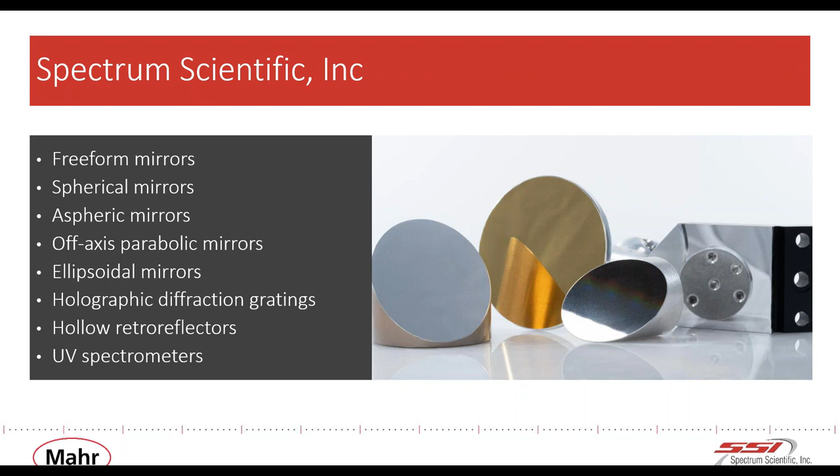We also have a range of miniature UV spectrometers and spectrometer components, which we supply into a variety of markets throughout the world.

Our freeform mirrors are manufactured using an optical transfer process that allows us to produce high-fidelity, high-specification freeform mirrors in OEM volumes at a fraction of the price of producing traditional freeform optics. Spectrum Scientific is currently delivering hundreds of freeforms each week using this process.

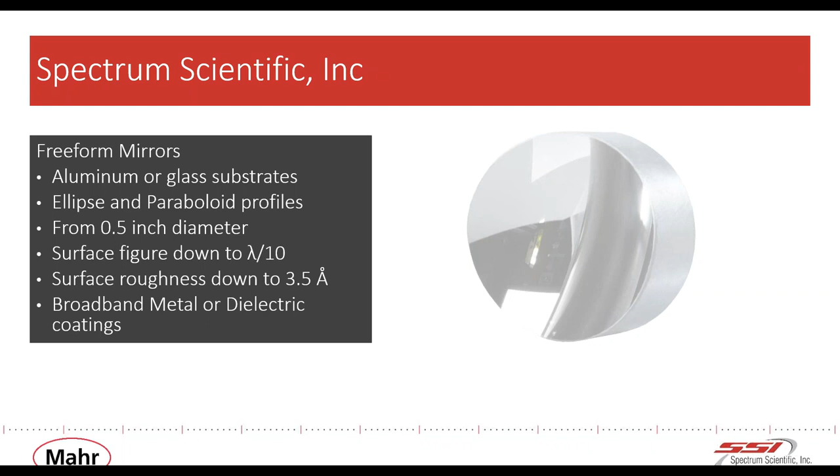We are providing lambda over 14 freeform optics right now. That's, by the way, peak to valley when I speak of these wavefronts. So we're providing lambda over 14 freeforms in production right now, and we've been doing lambda over 10 aspheres for many years. But again, it'll always depend on the size and complexity of the optic, whether that's achievable.

All right, enough about Spectrum Scientific. Let's get a few definitions underway. So according to the ISO standard, any surface that has no translational or rotational symmetry about the axes normal to the average plane is a freeform.

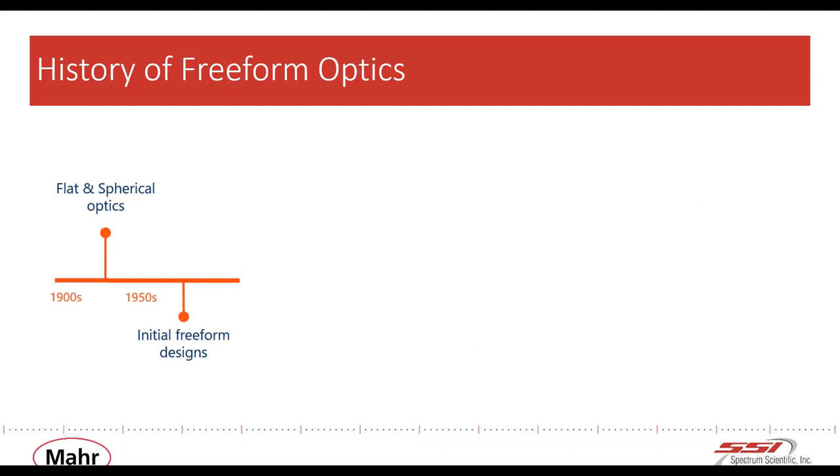So now that we've defined a freeform optic, let's give a brief rundown on the history. The concept of freeforms is nothing new. They've been discussed for a long time. Commercial manufacturing really didn't start until the 70s, and boy, back then they were called hand-figured optics.

Although a lot of the benefits of freeform optics were well understood, the cost and complexity of manufacturing meant that it wasn't until fairly recently that they've started to enter mainstream usage.

The enabling technologies were developed in the 80s and 90s when deterministic manufacturing processes came of age. Consistency of CNC machining, single-point diamond turning, deterministic micro-grinding, magneto-rheological finishing - these technologies all paved the way for this next wave of optical precision. However, even by the late 1990s, early 2000s, the cost of producing these was quite high and metrology methods were yet to catch up.

Now, in the past few years, metrology and manufacturing methods have evolved to better support the advancement of freeform technology. High-resolution cameras, improved encoders, software algorithms - those all lead to what we're able to do now. So companies, including Spectrum Scientific, now offer current state-of-the-art freeform optics in high volume with high fidelity and performance that in most cases is diffraction limited.

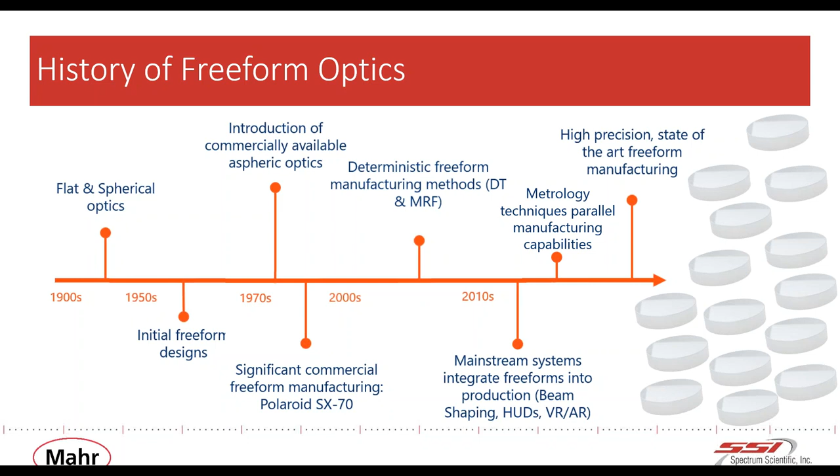As you know, nearly all technologies rely on precision optics. So naturally, freeform optics address many market needs as well, and they fit into nearly every technology sector for both high-tech and commercial applications. The advantages of freeform optics over conventional optics, such as increased aberration correction and optical volume reduction, can apply to a wide range of industries.

Some commercial applications include LED lighting, where they are able to more efficiently distribute the light energy. In the automotive industry, nearly all headlight lamps and reflectors are a type of freeform shape, and they've been doing freeforms for many years. Industrial applications include high power lasers for beam shaping using freeform lenses. In life sciences, they want compact devices for point of care. In telecommunications, designers are continually pushed and required to come up with more compact, optically efficient designs. One of the interesting applications for defense and aerospace I came across recently was aircraft wing optics - those are pretty interesting. If you ever get a chance to look into those, it's really quite fascinating what they're able to produce.

In the past, freeform optics were often too costly and too time-consuming to manufacture. So recent advancements in optical designing, manufacturing, and metrology are creating more opportunities to utilize freeforms in a wide range of industries and applications. So we've kind of grouped them into three here on this slide. We have non-imaging applications like LED lighting, laser beam shaping, illumination, light collection. We focus mostly on imaging optics here at Spectrum Scientific.

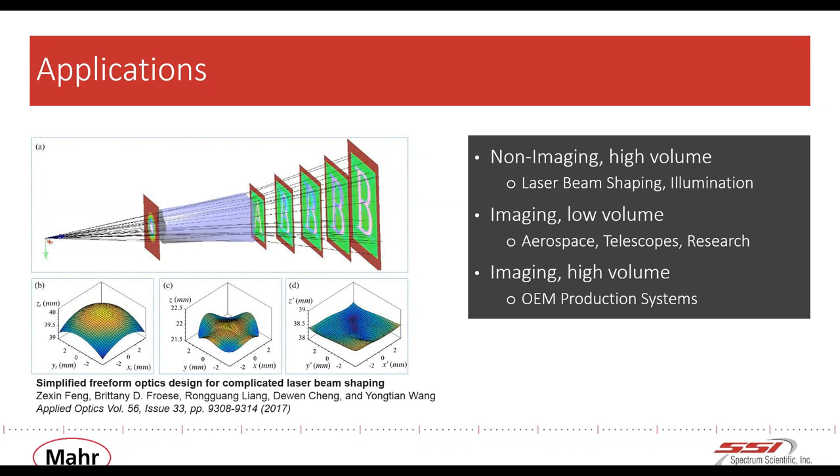So why are some companies choosing to go with freeform optics? I'm sure you already have many of your own ideas. I'll go through a few of the ones I know of.

Clearly, fewer optics in the system is a great advantage. When you can combine the function of two or more optical surfaces into one, that becomes quite powerful. Fewer lenses and mirrors means less optical scatter. In some cases, fewer elements means reduced assembly time. And of course, fewer components lead to lower hardware costs and less inventory.

Overall performance improvement is clearly one of the most common advantages and sought after reasons to go to freeforms. We've seen companies who've just improved one optic in an existing system, and suddenly they're getting diffraction limited performance or other performance improvements just by changing a single optic.

Space applications benefit greatly when using freeforms because reduced mass and volume are key benefits for launch requirements. Bulky lens assemblies have been converted into off-axis mirror designs. The Center for Freeform Optics has a great example of this. If you go to their website, they were able to convert a large lens assembly into a few reflective mirrors and really decrease the size while maintaining performance.

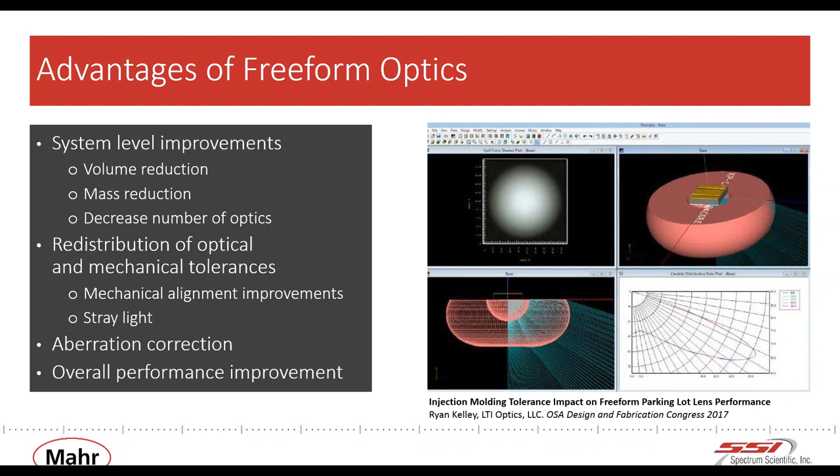Like many optical systems, application environment and other system requirements will often determine the best manufacturing and measurement method. Each and every freeform project will be unique, so each manufacturing case needs to be treated separately.

Some designers often ask, what are the limitations? When have we exceeded what can be manufactured? Basically, I think it's steep curves that are the most challenging, not just to make but also to measure. We'll address that a little bit more in an upcoming metrology slide.

So what does the designer need to provide to the manufacturer to be successful? As we stated earlier, the customer supplies a surface equation to the manufacturer, and we strongly suggest that both parties generate and compare SAG tables. This table is verified by the customer, and it becomes a reference table for a point cloud that will be generated.

By contact or non-contact probes, or even interferometric data. In most cases, aligning a freeform is similar to aligning an off-axis asphere, where all 6 degrees of freedom must be precisely controlled. Therefore, the surfaces should have reference datums or alignment features that can be picked up by the machine operator and the end user. This is extremely important during manufacturing, and we're going to touch on this later because the fiducials and alignments are that important. So we'll come back to that.

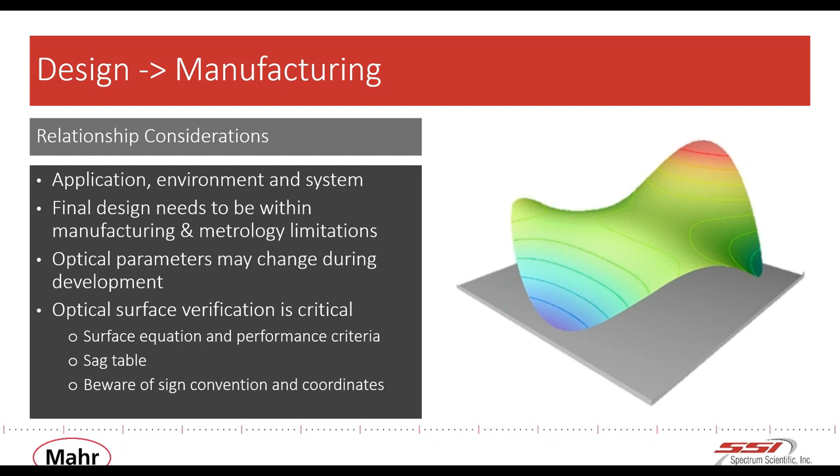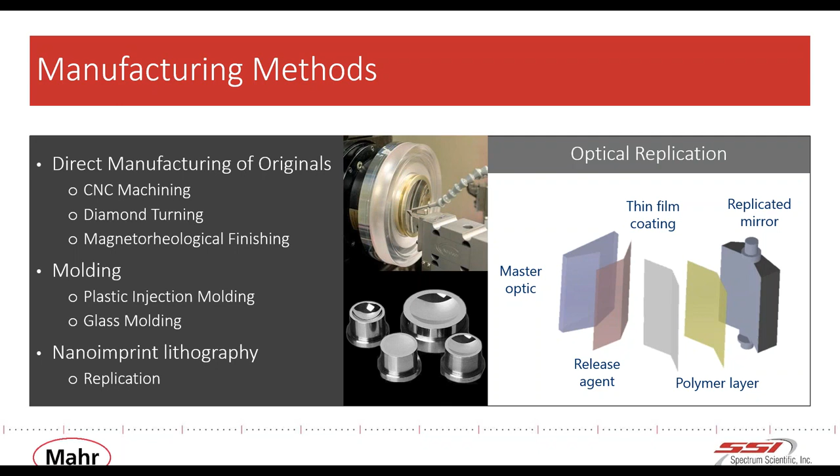Manufacturing freeforms directly, they're done one at a time, unless it's a lenslet array or a set of micro lenses. For larger optics, you don't just gang them up on a spindle and grind and polish them all at one time. They're usually made one at a time. So as you can imagine, that requires many hours of grinding and polishing to produce a single part, and a machine can be tied up for a long time.

Injection molding and replication type processes have the advantage of making a set of molds or tools that can be used to create dozens or hundreds of parts at a time. Also, for direct manufacturing methods, part-to-part and batch-to-batch variations are common, especially for high specification parts. Methods optimized for high volume production have reduced variability since each part is obtained from the same master mold.

There are cost considerations for higher volume production scaling. When you're manufacturing originals, there's usually a setup fee, an NRE tooling fee, typically a few thousand dollars. For higher volume manufacturing methods, there's a higher upfront cost, and that kind of makes sense when you think about it, because we're moving more parts through the production floor, so you have more carriers and fixtures to associate with all these parts being made.

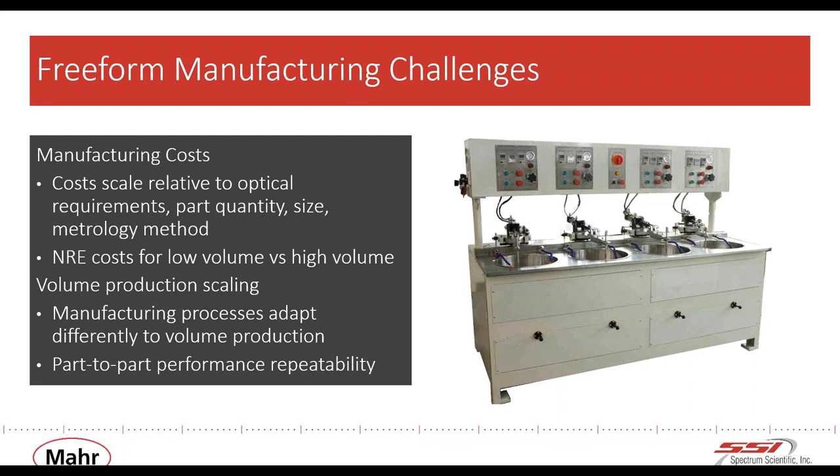So we move to the metrology side. Testing and measurements are taken by contact and non-contact methods. Besides mechanical dimensions, optical parameters usually include surface figure, roughness, and mid-spatial frequency. Of course, different applications require different levels of precision for each measurement parameter.

For replication and molding processes, the master molds are measured to a very high level of detail. However, not all these measurements are always necessary during final production. Surface roughness and mid-spatial frequencies will typically remain constant during production. It's surface figure and cosmetic inspection that are commonly the parameters that are measured. So for some customers, we measure those 100%. Some customers allow us to do batch-to-batch testing or AQL testing for a given batch size.

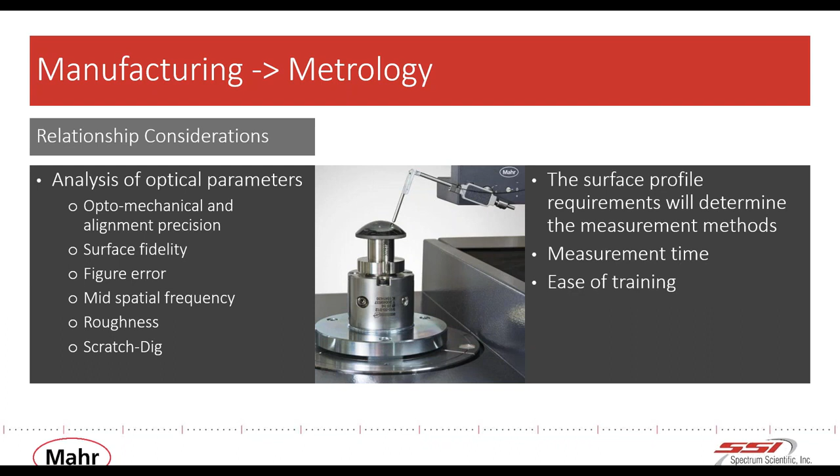You might recall I mentioned that for freeform surfaces, only a few microns or fringes of departure is required from a standard surface, so nanometer level metrology must be used. When using interferometry, if the slopes are too steep, the fringe density on the interferometer will exceed the pixel resolution. So it helps to have a high-resolution sensor. If you cannot resolve the fringes, you're going to have to move to a probing method, either contact or non-contact probing.

Not long ago, CMM was a common method of measuring freeform surfaces. I recall even 10 or 12 years ago, I was in a shop, and that's how they were doing it. They were using the CMM to get a point cloud. However, the newest generation of contact and non-contact probes offer tremendous precision.

I need to get back to fiducials again. Freeforms are more susceptible to alignment errors than conventional optics. Most aspheric surfaces can be measured with interferometry using first principle methods, where point sources and plane wave interferometry can be used to null the wavefront. Freeforms do not have this advantage.

Therefore, fiducials and datums are critical for angular and linear coordinates. The manufacturer will use these for production and test, while the end user will rely on fiducials for system integration.

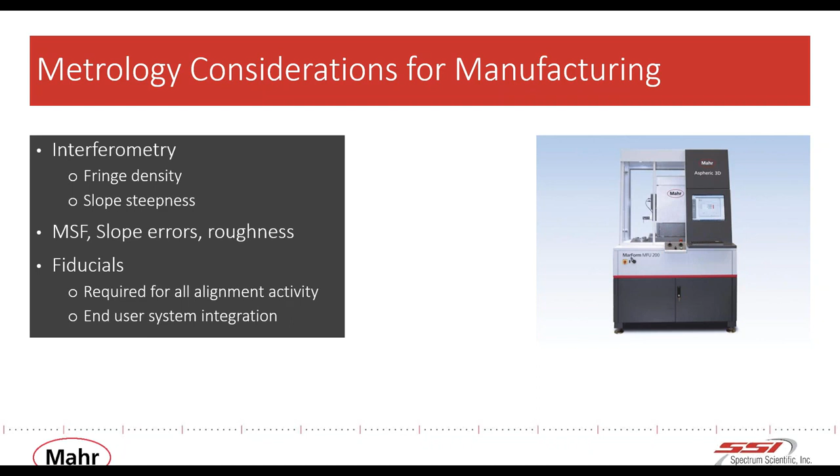Thank you. Yes, hello everybody from my side as well. Thanks to Byron and David so far.

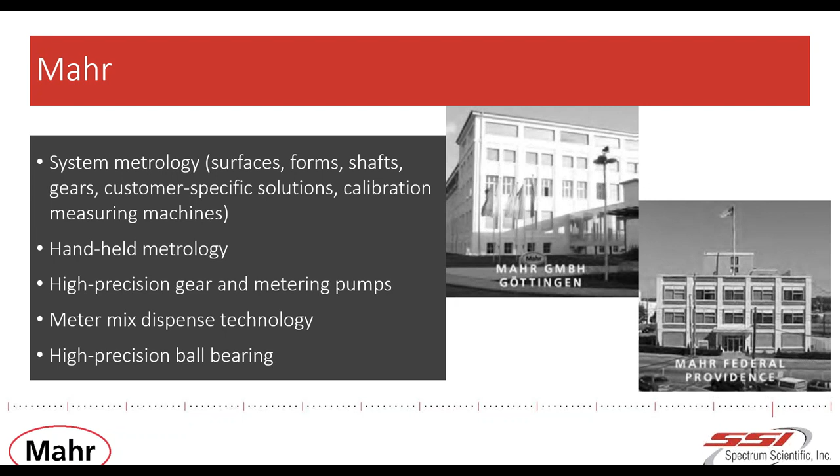Let me start with some words about Mahr first. Mahr is a family-owned company looking back on more than 150 years of history. We have approximately 2,000 colleagues working in subsidiaries in 18 countries worldwide, and Mahr is active in more than 60 countries. The main business is dimensional metrology. The company became well known for its handheld metrology like calipers or indicators, but is nowadays also developing and selling complex measurement machines for automotive industry and of course for the optical industry.

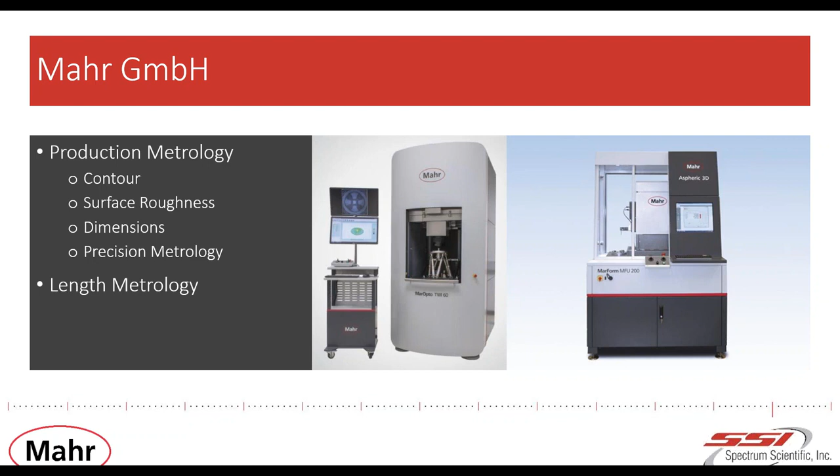The wide spectrum of products covers the measurement of a number of quality characteristics. Especially in optical manufacturing, measurement solutions are available for every process step in the production of optics. This ranges from 2D tactile profilometers for the correction of grinding processes up to non-contact point sensor systems and interferometers used for quality control during polishing.

Okay, let's talk about freeforms. David already mentioned that fiducials play a special role when it comes to mounting, manufacturing, or measuring of freeform optics. We can simply translate the word fiducial as reference. Here's a simple example that should give us a feeling of what a fiducial is.

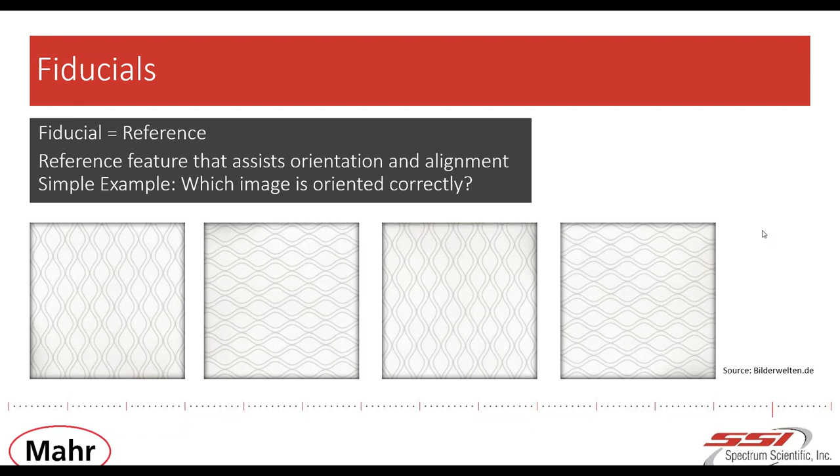We have 4 pictures showing the very same wallpaper, and if I ask somebody which of the pictures has the correct orientation, you would probably say you have no clue. But if we enlarge the picture section, so this little lamp becomes visible, we are able to answer the question because we know about the usual orientation of a lamp. We use this lamp as a fiducial in order to eliminate the freedom of rotation. This is basically the main function of fiducials. They are required to reduce the degree of freedom.

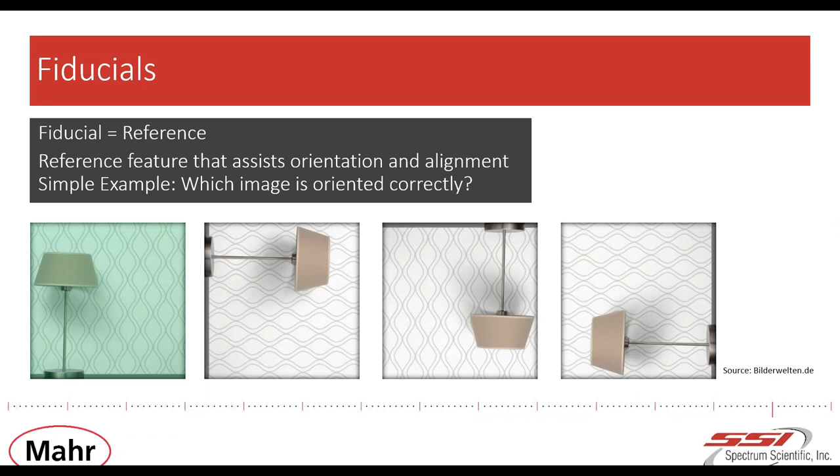Reducing the degree of freedom becomes important when we measure optical surfaces, especially freeforms. In order to make the errors of the surface visible, we subtract the nominal shape from the measured data. To do this, the data are fitted into the nominal shape in order to minimize the RMS value of the differential surface, which is the result. In the 3D measurement, we have 3 translational and 3 rotational freedoms.

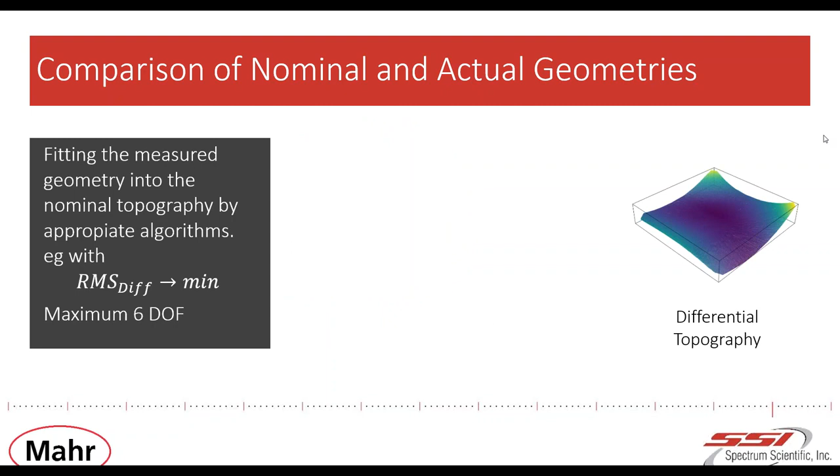The differential topography is then sent back to the processing machine in order to eliminate the residual deviations, for example, improve the PV value and bring it within the specification.

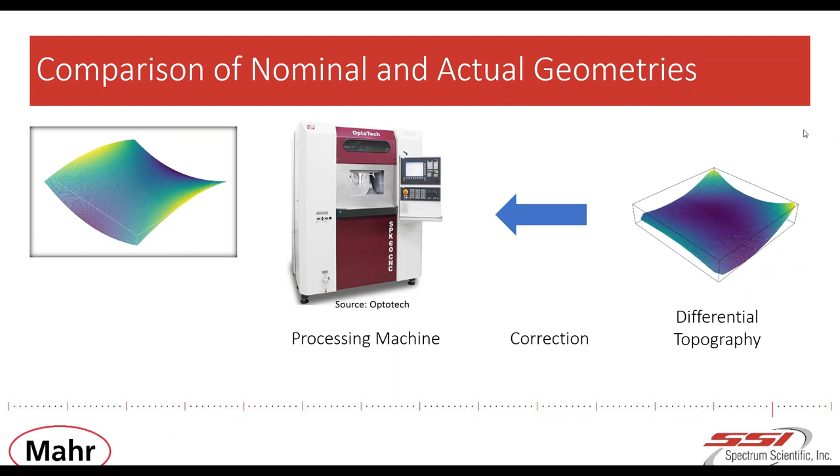If the algorithm for fitting has too many freedoms, it is possible that a wrong result is computed, like in this example. In this case, the differential topography has the same RMS value like the previous one, but it is obvious that

using this topography for correction will aggravate the deviation of the surface instead of improving it. So in order to improve the quality of the fit, it is necessary to lock freedoms. In this case, it would help to lock the rotation around the Z-axis.

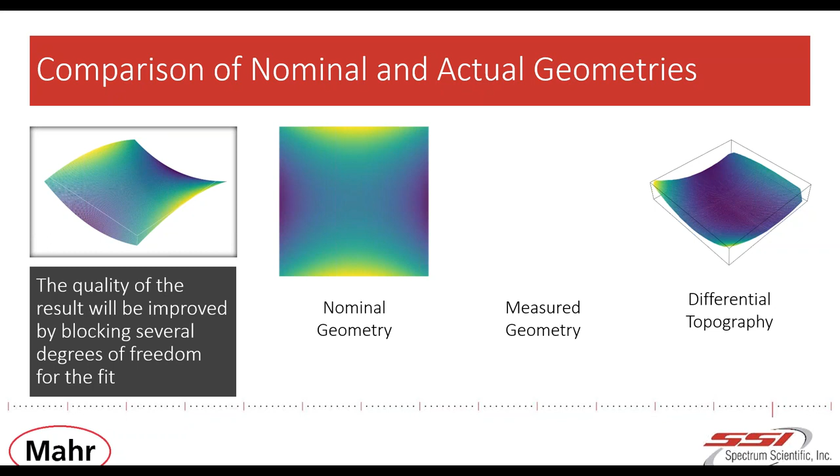So using mechanical fiducials requires proper metrology equipment. This is where I want to introduce the MarForm MFU 200 Aspheric.

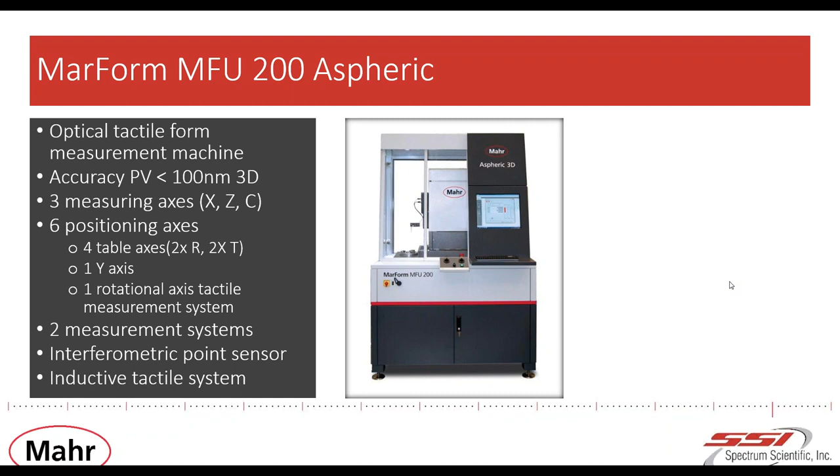This machine is equipped with two sensor systems, which are an interferometric point sensor and an inductive tactile system. Besides this, the system has several measuring and position axes.

One of these is the high accurate rotation axis that is used to spin the sample in order to record measurement data along concentric circles. On top of this rotational axis, we can find a motorized tip-tilt stage that can be used for automatic centration and alignment of the optic.

So if we take a closer look at the sensor head, we see the tactile measurement system can be rotated around 360 degrees. That makes it possible to swivel the optical sensor, which is now active, and change between it and the tactile sensor, which is now at the bottom. This is possible at any time without moving or unmounting any parts.

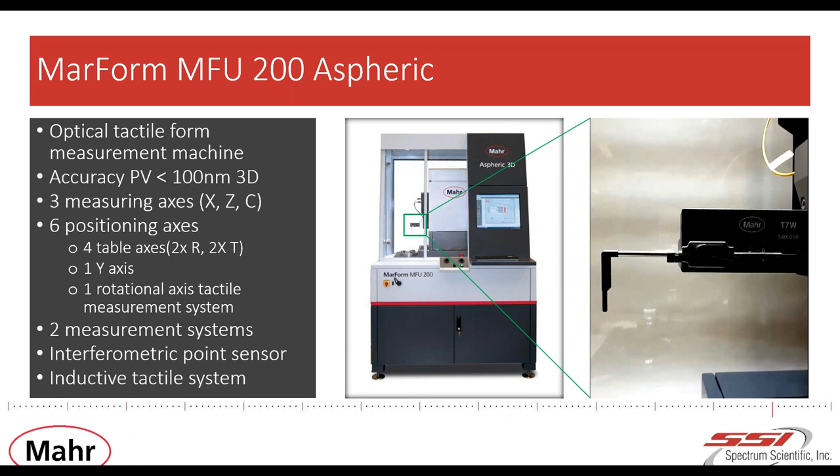Let's talk about some examples. The first one I would like to show is actually no freeform, but it explains the usage of fiducials very well. This is an aspheric mold used for pressing of aspheric lenses. And this part is diamond turned, so we conducted 2D measurement, assuming that the surface errors are rotationally symmetric.

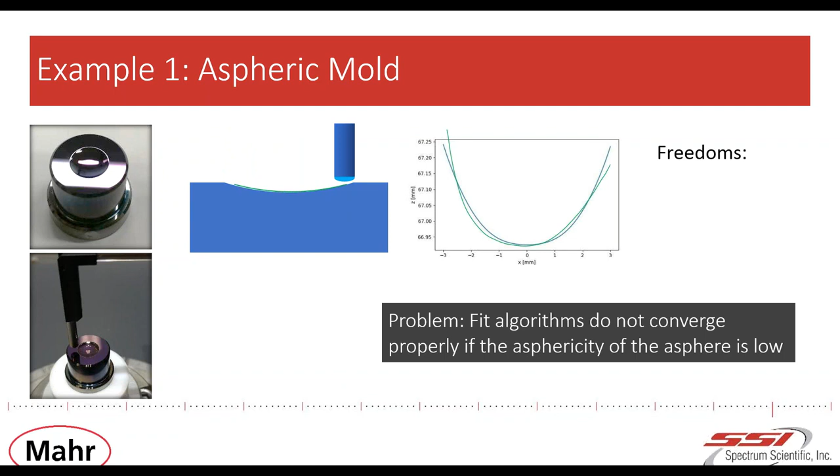So if we now fit the measured data into the nominal shape, we have 3 degrees, 3 freedoms, 2 lateral, and 1 rotational. The problem could be in this case that the asphericity of the optic is very low, so the rotational freedom will cause an error because the algorithm cannot converge.

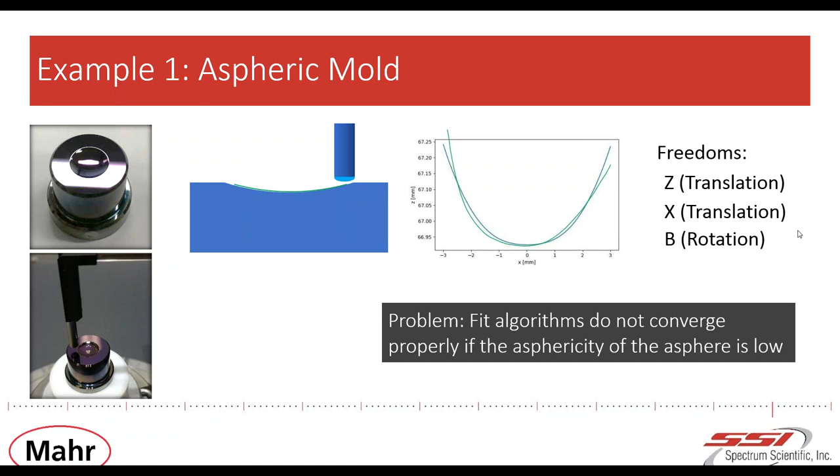So we need to get rid of this rotational freedom, and we do this by untilting the part using the plane surface at the top. Therefore, we increase the scanning length to have sections of the plane surface in the profile.

These sections can now be used for additional alignment of the data in the software, and the rotational freedom will be locked and the correct result can be found.

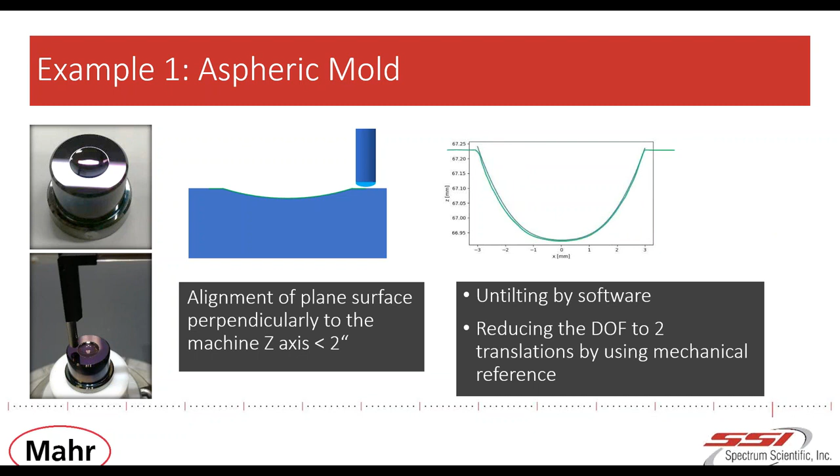The second example I would like to show is a Toric lens. Just as a reminder, a Toric lens is a lens that has 2 different radii of curvature along the X and the Y direction. We can imagine a Toric like the slice of a donut.

On this optic, a 3D measurement will be conducted. That means we have 6 freedoms and we are going to eliminate 3 of them. Therefore, we use the outer boundaries as mechanical fiducials of the part.

First, we eliminate the rotation around Z, which is also called C. Therefore, a tactile scan is done at the front side of the element.

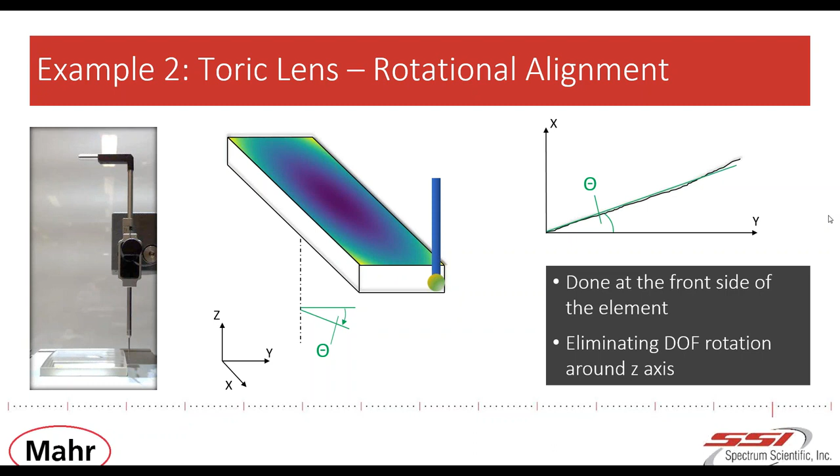The resulting line delivers now information about the current rotational misalignment angle theta, which is then compensated by rotating the part around this angle in the opposite direction.

Next, alignment procedure will take care about the centration of the part on using the machine, using the motorized stage of the machine. This centration will be done on the outer boundaries as well, contacting each side once and detect the position of the optical element.

So by knowing the position of the four side surfaces, the part can be centered.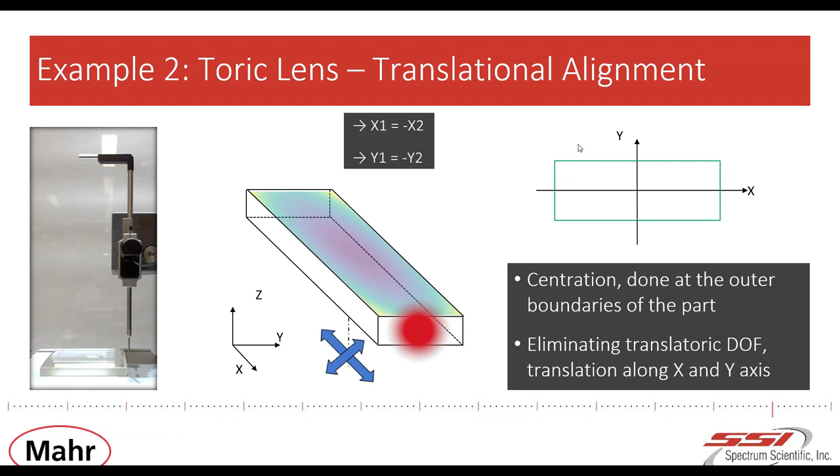The machine operates in active tracking mode here. That means that the vertical axis moves the sensor head up and down in order to follow the shape of the surface.

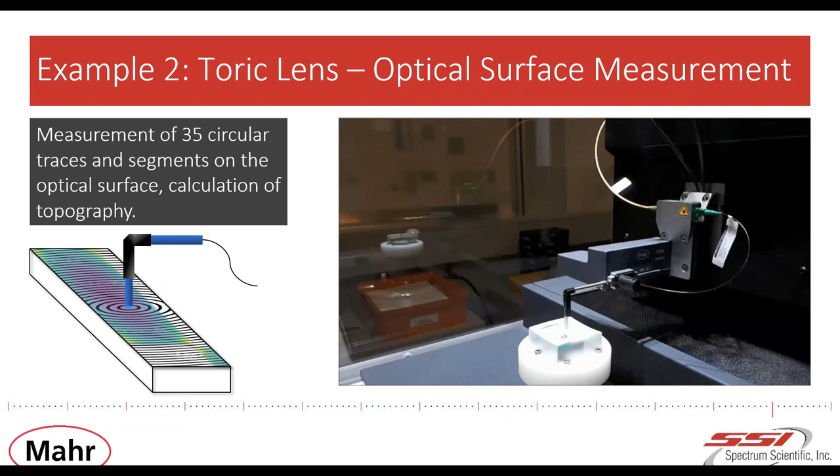Evaluation: From the 6 freedoms that initially existed, we eliminated 3, which allows us to compute the correct differential profile now and make the surface deviation visible.

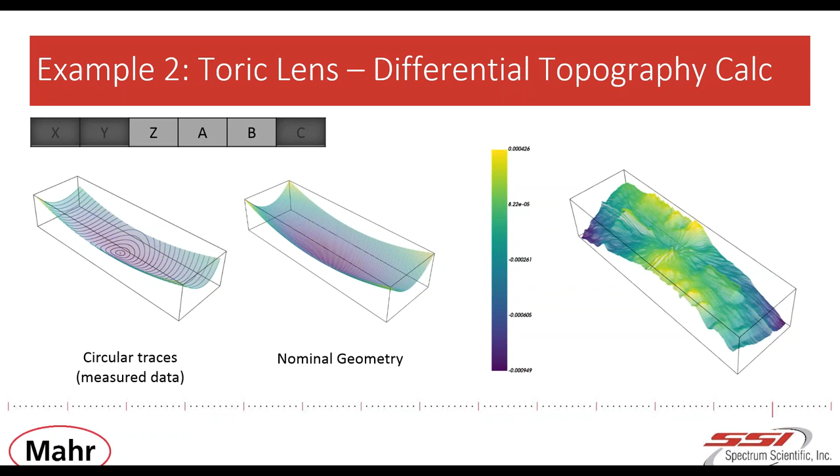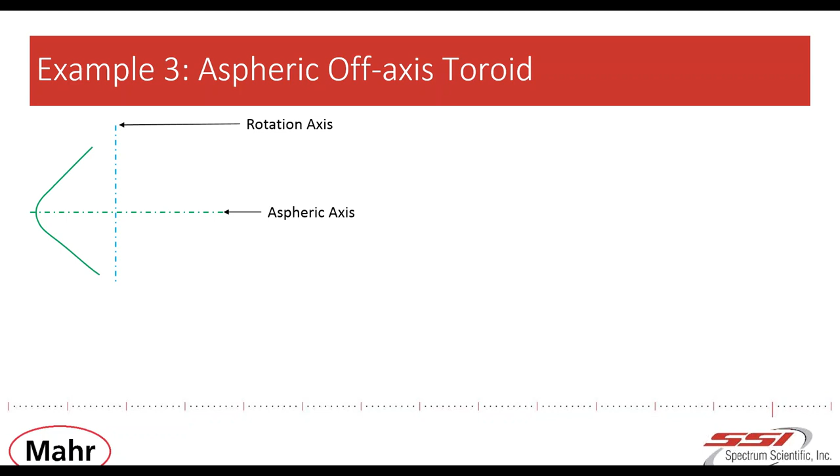Our last example for today is an off-axis toroid. This is a surface that is created by rotating an aspheric profile around an axis. We can imagine the resulting object as a Chinese lantern.

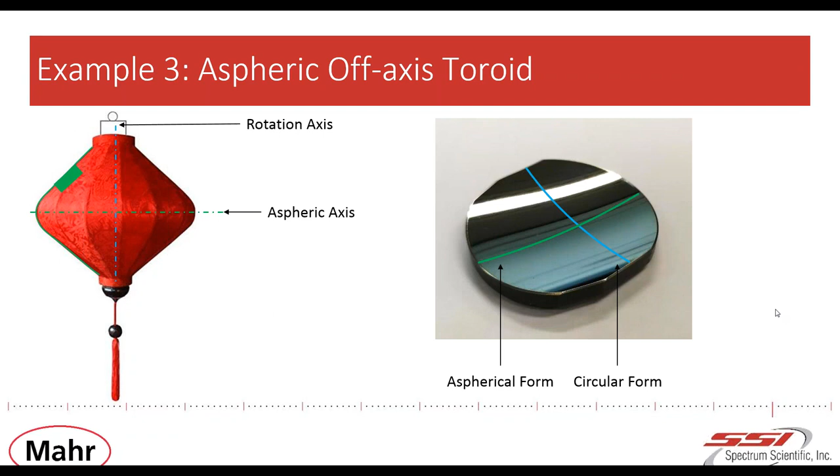From this, we imaginarily cut out a piece of the aspheric axis, and the resulting optical element has now a circular form in one direction and an aspheric form in the other direction.

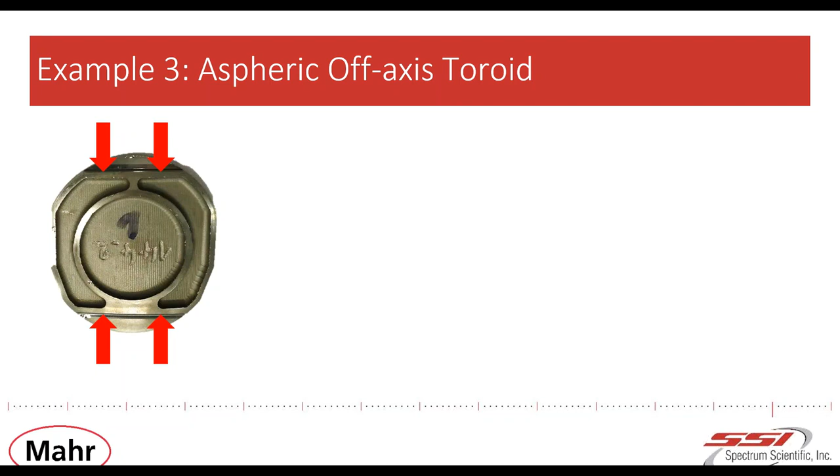If we take a look at the backside of this part, we can see there are 2 linear edges that are used for the mounting of the component in the final optical assembly. We will use these edges as fiducials now, and to mount the mirror during the measurement, a special holder is used.

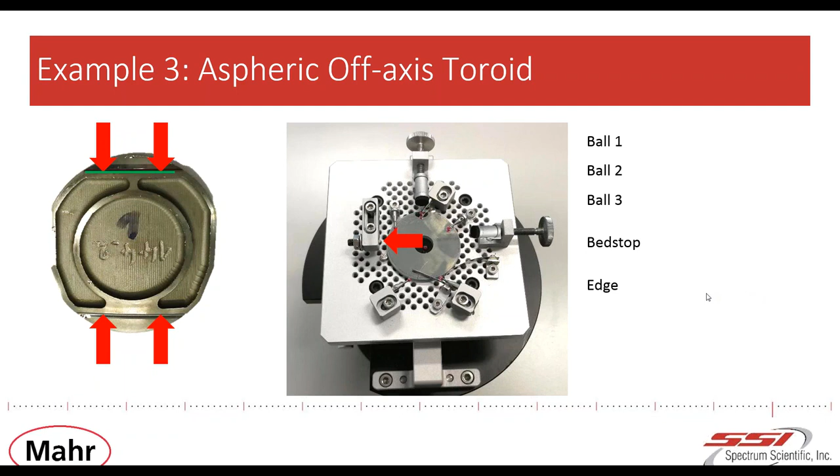This holder is equipped with 3 ruby balls, 1, 2, and 3, as well as with a bedstop on the left side. These elements and the upper linear edge on the part itself are now used to eliminate 5 freedoms.

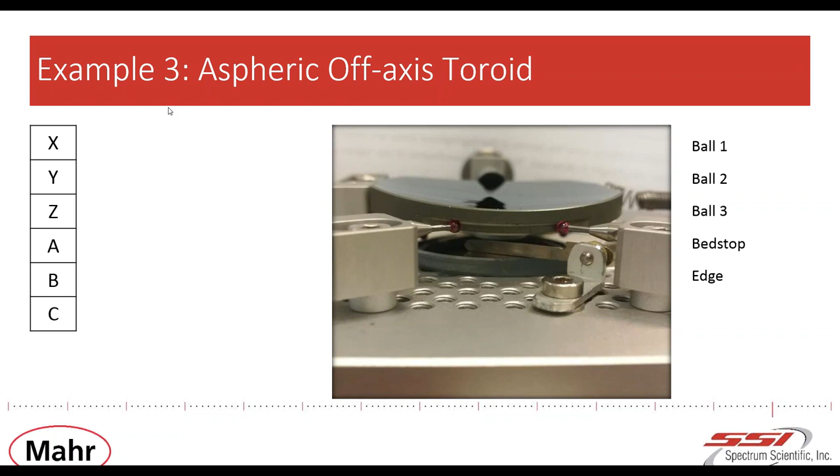We can basically say that we reduce the freedom X with ball 2 or 3, and the height of the part is eliminated by ball 1, 2, and 3. Ball 2 and 3 and the edge determine the rotation around X. Ball 2 or 3 and ball 1 determine the rotation around Y, also called B. And ball 2 or 3 and the edge determine the rotation around Z, also called C.

So the position along the Y-axis is fixed by the bed stop. This is the only position that is not determined by the balls.

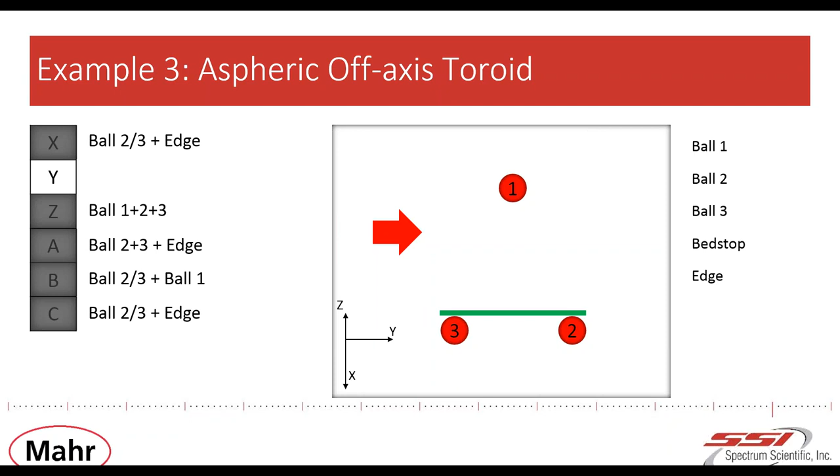We see that it is crucial to know the exact position of the 3 balls, and this is necessary to be able to transform the coordinate system of the nominal topography into the machine coordinate system. This becomes possible by determination of the zenith positions of each of the 3 balls, which is done using our optical sensor.

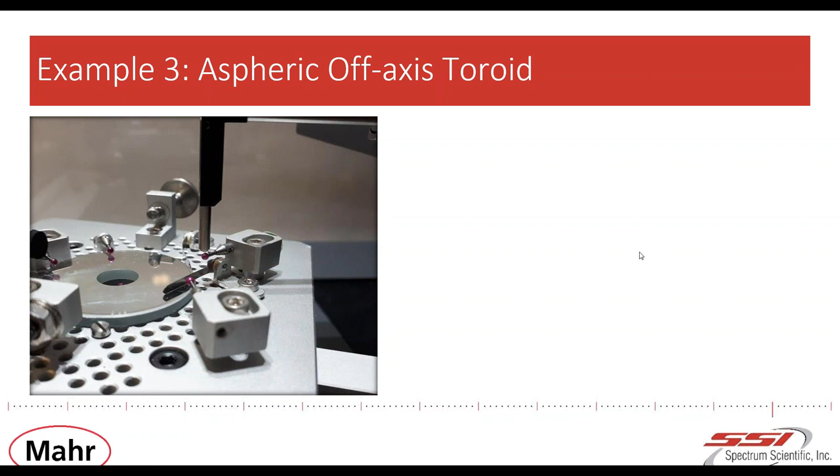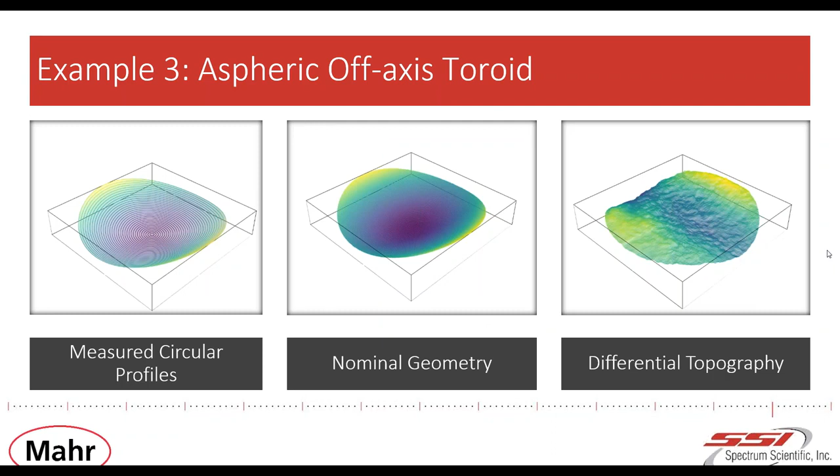And after this is done, we can measure the surface of the mirror again with concentric circles. So 5 freedoms have been eliminated in order to evaluate the measurement.

Now we allow the fit algorithm only to shift the measured data along the Y direction to compute the resulting differential topography. And the previously measured positions of the ruby balls are used to shift the coordinate system of the nominal topography into the machine's coordinate system.

The resulting differential topography contains now all deviations of the optical surface itself and the deviation caused by a misplacement of the surface with respect to the mounting edge.

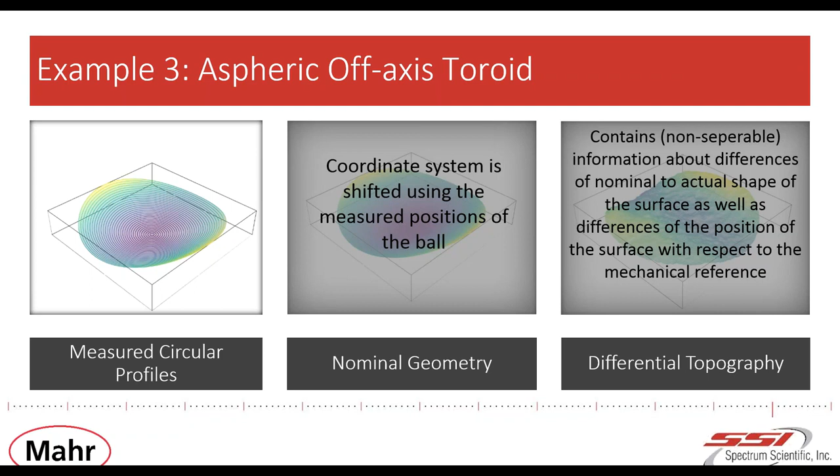This resulting differential topography can now be transferred back to the processing machine for the correction process. And the already mentioned inseparability of the deviations is not important, since the resulting error refers to the mounting interface of the part, which is the final decisive criterion that has to be fulfilled. The optical surface is manufactured correctly with respect to the final mounting.